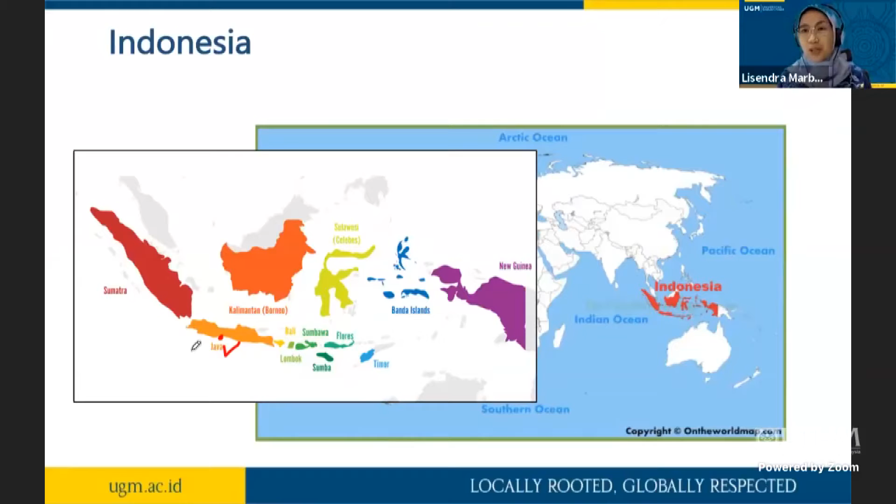I just take this opportunity to bring my country, although we are very close. This is Indonesia, and UGM is in Java Island. Yogyakarta is somewhere around here, so probably in the future if you come to Yogyakarta or UGM, you can visit us. Jogja is very known as a cultural city, and we have several temples close by. It's very cultural because we still also have a king and something like that. So it's very nice in my point of view.

UGM is actually one of the oldest and one of the biggest universities in Indonesia. Now we have a total student body of around 47,000 students, with 265 study programs. I work in the Department of Chemical Engineering, and we also have civil engineering, environment, and related departments. This afternoon I'm going to talk about membrane technology applications for environmental protection.

The outline for my sharing today: first will be membrane technology basics and introduction, afterward there will be some applications, and afterward some trends and challenges in membrane technology. So the first one is membrane technology basics and introduction.

If participants can give chat, I don't know if you can answer. If you try to take a look around, do you know if membrane exists around you? Do you know what membrane filter exists around you in your daily living? I don't know if you can think of something. You can chat, I don't know if students or other participants can think about something.

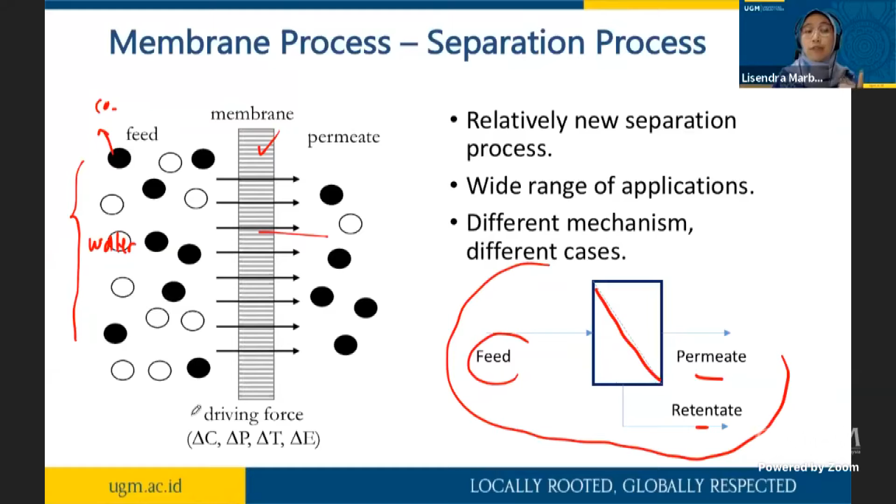So the clean one, and the other one is the rejected one. What is the driving force? The normal driving force is pressure, but we can also have different concentration or different temperature.

Why is it important? Separation processes and membranes relate to environmental protection. We see a bigger picture involving chemical industry, agricultural industry, houses, and mining - different types of human activities. Some of these processes are energy intensive, and membranes can work there for separation processes.

There is also a lot of wastewater produced. We have polluted water, and there is a need to separate the water and the pollutant, but we also have polluted air. There are really a lot of applications that separation and membranes can be used for. Membrane technology can be used for process intensification in chemical industry or processes in general, and also for purification of wastewater and for air pollution, for gas separation.

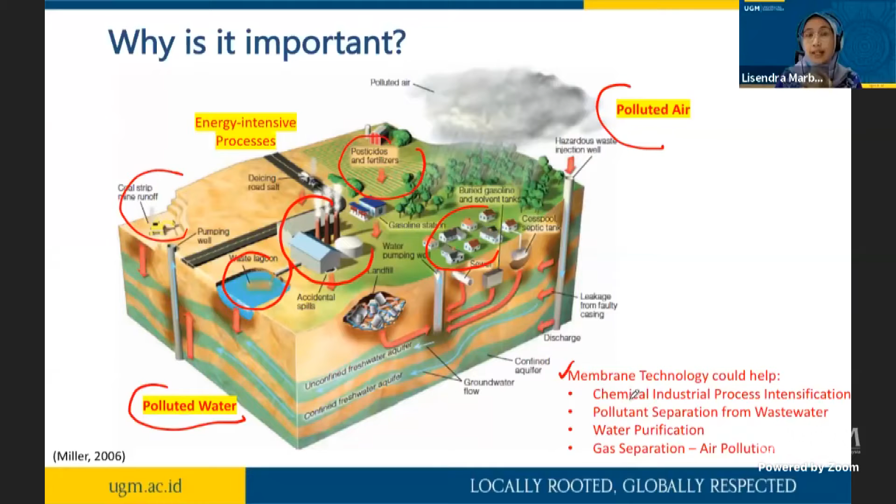Next, I'm going to talk about the basics of the membrane. That's the background of why it's very important, and nowadays it's being used in a lot of areas.

Basically, membrane processes can be differentiated into different names depending on the pore size of the membrane. If you remember, we have a process like this: we have the feed, the retentate, and the filtrate. This semi-permeable barrier, the membrane itself, has different pore sizes, measured in micrometers, whether it's macroparticle, microparticle, macromolecular, or ionic range. Depending on what we want to separate, we can name different types of membranes.

The first one is the normal filter, called particle filtration, but we can also have microfiltration membranes, which can separate bacteria and latex emulsions. We also have ultrafiltration, used for separation of viruses and proteins. We can have nanofiltration if we want to separate smaller organic molecules like sugars. We also have reverse osmosis when we want to separate salts.

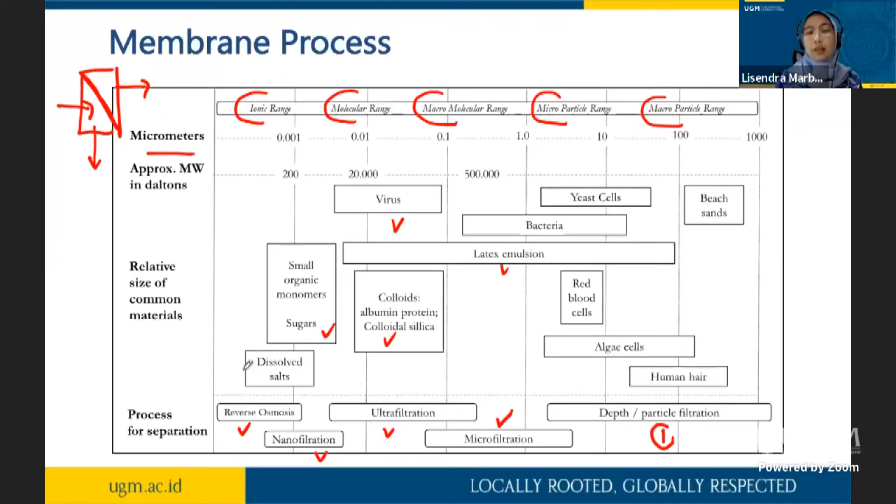And then more dense, we can also have dense membrane if we want to separate gases like nitrogen and oxygen, or methane and CO2, for example. So depending on the physical properties of the membranes, the pore size, membranes are differentiated into different types.

What about the history of the membrane? It actually started in the beginning of 1920 in Germany, during the war or something like that, where there was a need for people to have clean water to drink. It was microfiltration, the first filter found, used to remove bacteria from water. Afterward, it was improved, and they found hemodialysis, if you know this membrane.

This is one of the most used membranes. It's for the kidney - if you have a kidney disease, it separates the dirt from your blood. So this is one of the oldest membranes also, and now it's still being used.

Afterward, it grew for other applications, for desalination - to get clean water from seawater - and then afterward it was used to remove water from proteins for concentration of macromolecules. After the 80s, it started to grow into gas separation for hydrogen recovery, and afterwards it also grew for dehydration of organic solvent - pervaporation and nanofiltration.

So the first one is microfiltration, and then reverse osmosis. Afterward, it moves on to gas separation.

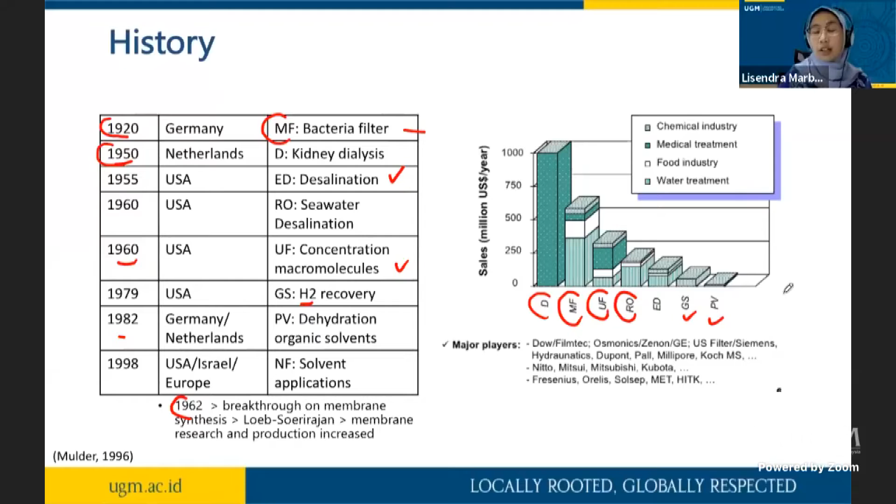If we differentiate the membrane types, there are two main filters. The depth one is when you have a lot of pores inside, and the screen one is normally what we call a membrane, because the separation occurs on the screen of the filter, on top of it. The membrane can have cylindrical pores, or it can be porous all over, but it can also be dense membrane, which is used for gas separation.

This is normally for nanofiltration, and this is for normally microfiltration and ultrafiltration. So depending on the structure of the membrane, they can look very different.

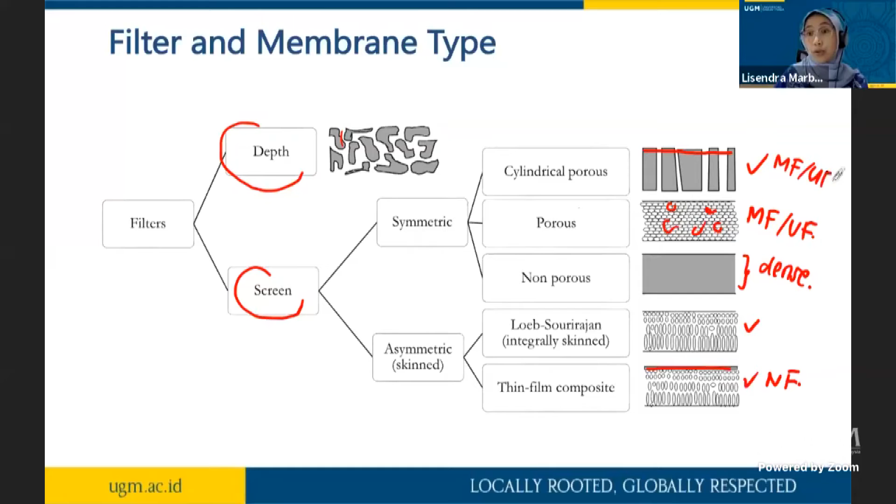So this is the scheme. Actually, this is screen filtration, because the separation occurs here. For example, we have water, then the water will pass through, and the particle will be retained on top. While in depth filtration, the normal filter can be made from mesh filter or other things. Normally it can clog inside the filters.

So this is a porous filter. When it's a porous filter, it means there's a gap for the molecule to pass through. But when we have a dense membrane, it's something like this, but still...

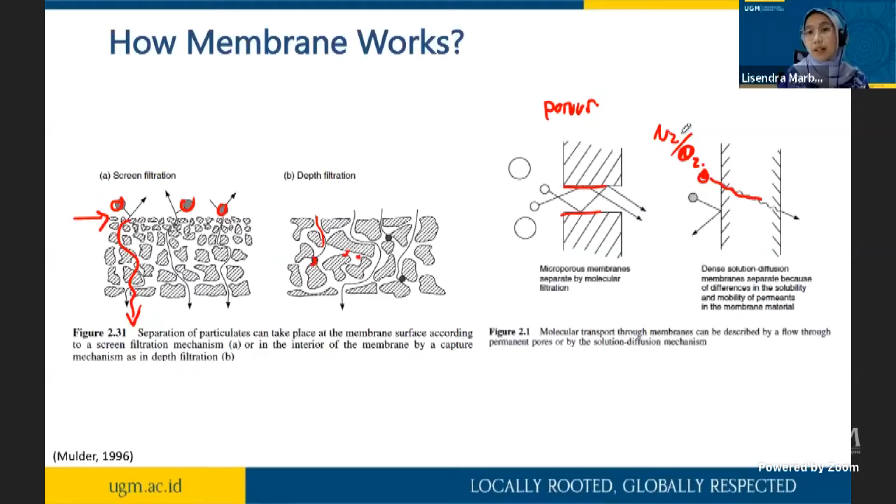chemicals can pass through. This is for gas membrane. For example, when we want to separate nitrogen and oxygen, the diffusivity of the chemicals will determine the transport of the membrane. So membranes can be porous and membranes can be dense.

So how do we make membranes? Basically, the most used one is phase inversion membrane, made from polymeric substances. How do we make it? We do phase inversion in a solvent, and then the solvent is evaporated. It's for cellulose acetate, polyvinyl chloride, but you can also have immersion precipitation.

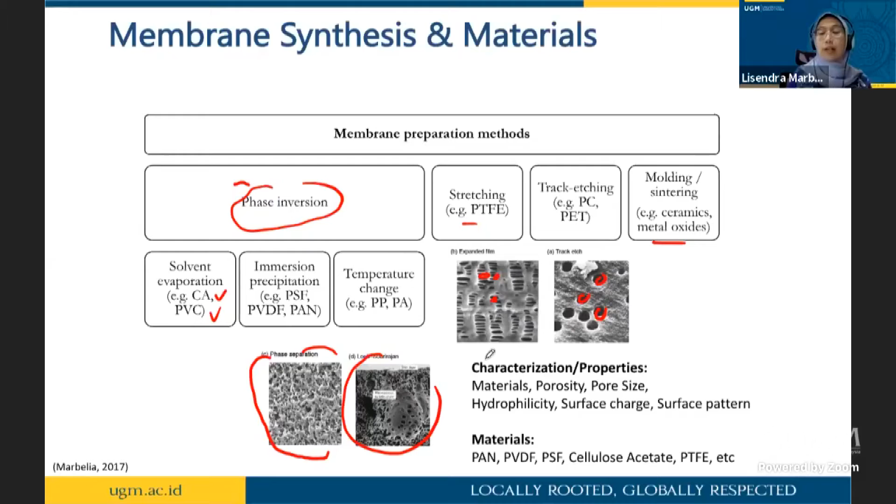So for characterization, what is important is the materials, the porosity as I mentioned before, the pore size, and the chemistry of the surface is also very important. And the materials I mentioned are like this.

So how does the membrane look? It looks like this. The first one is what we call flat sheet. In flat sheet membranes, when the membrane is made, it will be like a layer of paper, and then it's potted into a module, something like this. The size can be smaller or bigger depending on the application.

It can also be formed into multi-tube. If you see, this is like a straw, and then they put it in a big housing. And the last one is hollow fiber. Hollow fiber is very small, and then they put it in a module, something like this.

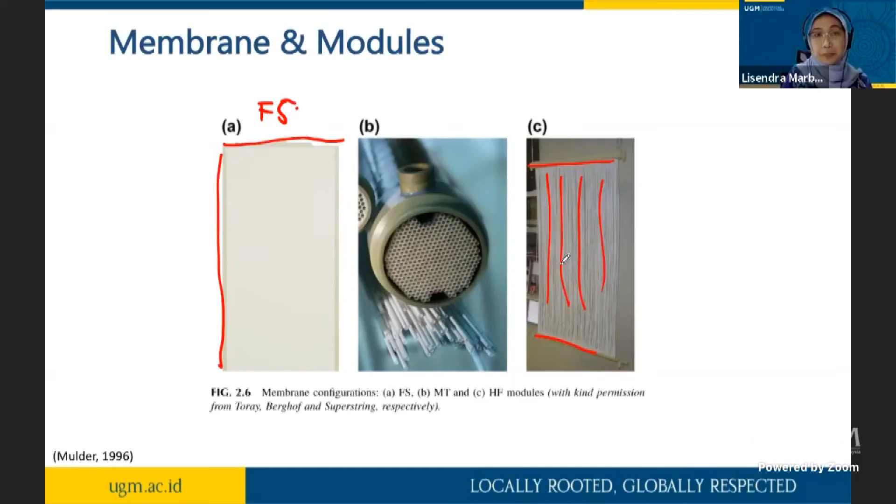So for different applications, different types of modules can be used. How it's made, as I mentioned before, the most used material is polymer. So with polymer solution, we make the casting, and after that we do the phase inversion.

It looks like this when it's at a bigger scale, and it's already produced a lot for different applications. The polymeric solution is cast here, then it's immersed in water, and then it's washed around here, and it looks like this.

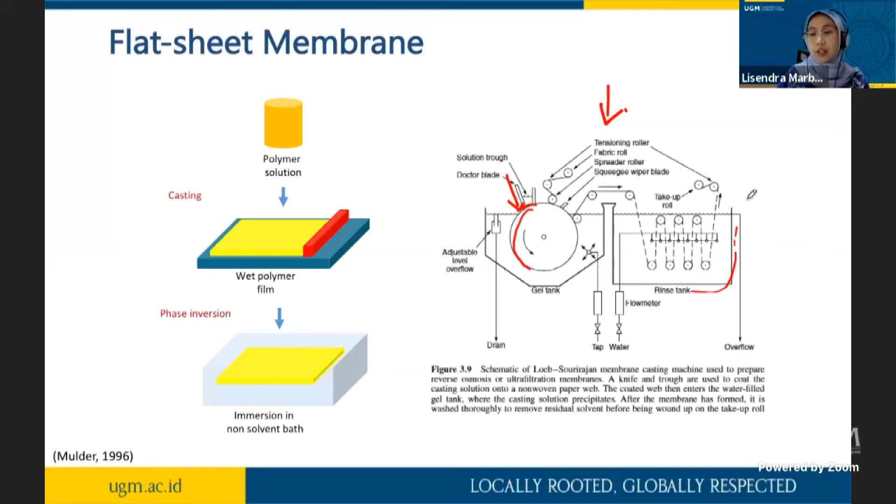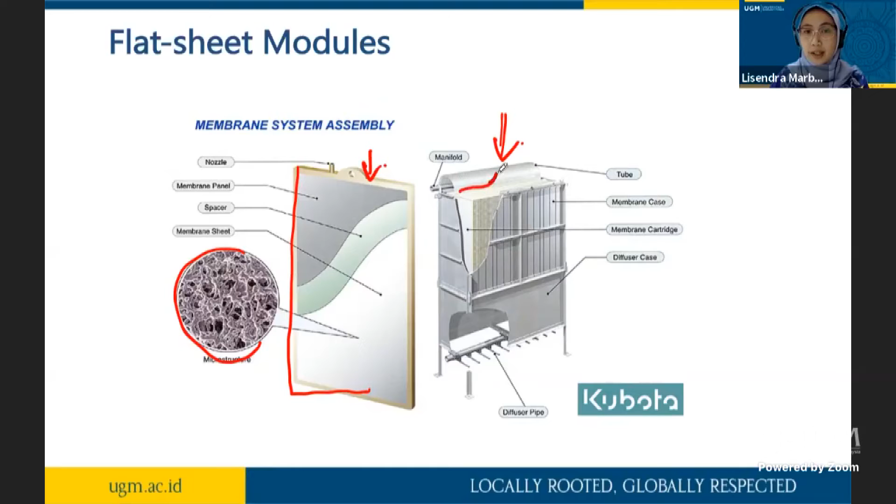Normally, these are the modules. If we see the microstructure, it actually looks like this. And then normally, this is what we call membrane modules. It contains a lot of flat sheet membrane filters, arranged so that the permeate can go to this pipe, and then it's collected.

Different shapes include spiral wound, which is also flat sheet, but they are not in an envelope state, rather they are rolled, something like this. Normally this is used for reverse osmosis application, and also gas separation, using spiral wound modules.

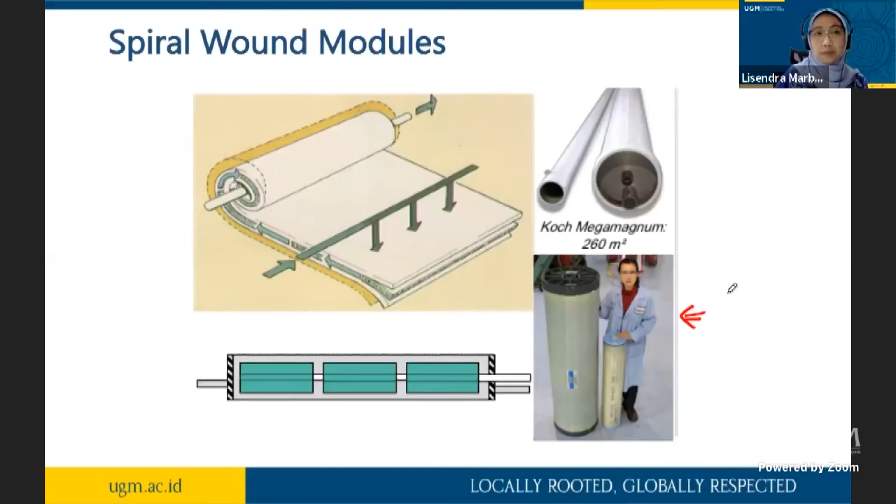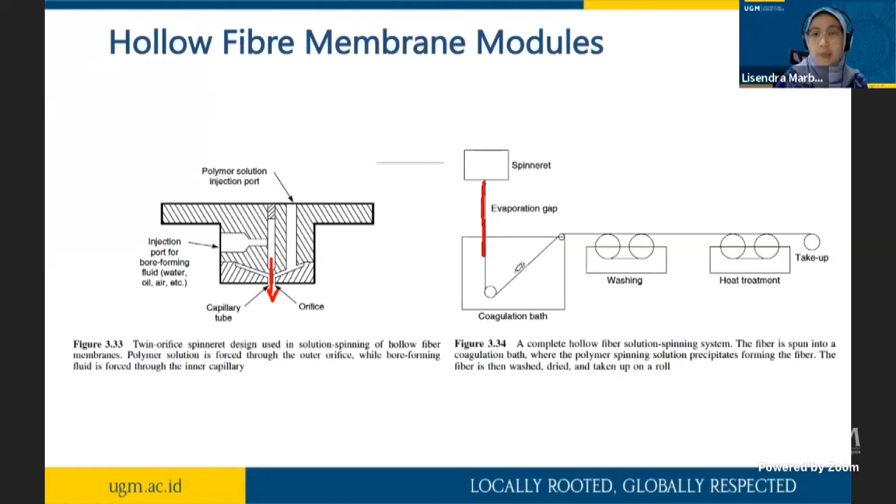For hollow fibers, it's the same - there is also the polymer part, but instead of casting a thin layer, it goes into a spinneret. It's like a ring, and the polymer solution goes outside this, then it immerses into the water, solidifies, and it's ready.

So it looks like this: the membranes, and the membrane housing. It's normally something like this, so this is the membrane. For example, if we use it for wastewater treatment, we can put this inside a big tank, something like that, and the permeation will happen from outside to inside this membrane, and then clean water can be collected.

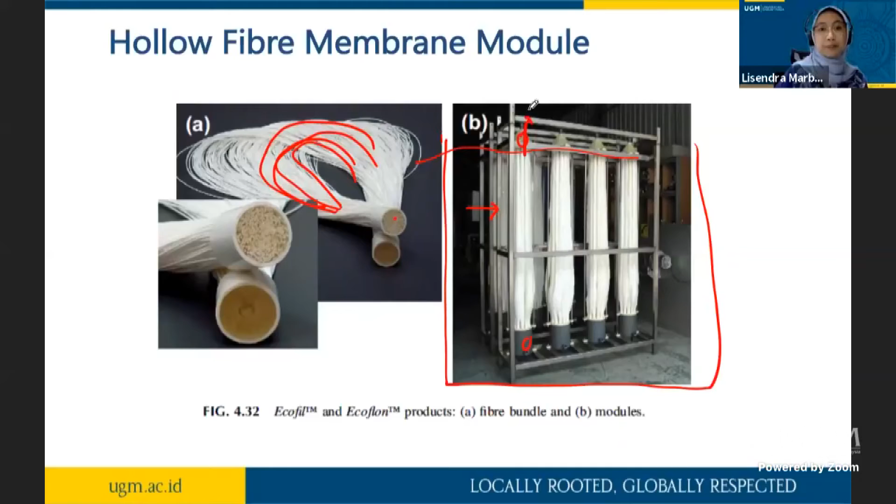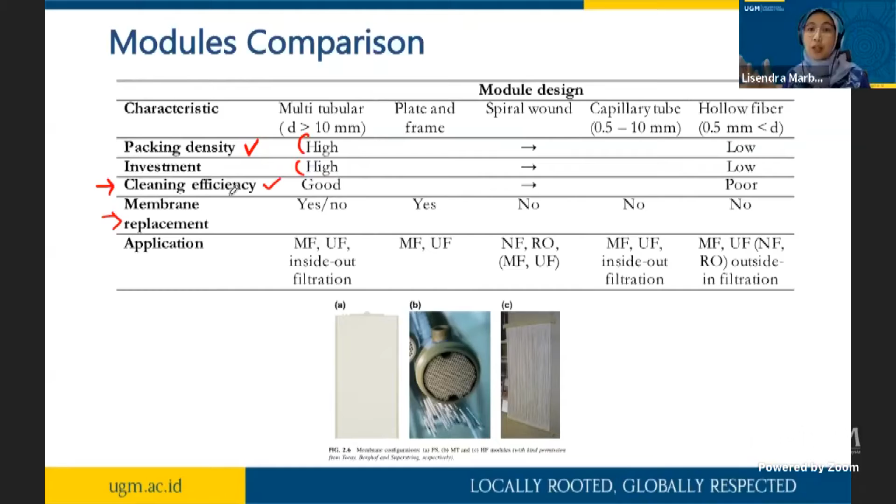This is also important because after use, the membrane will get dirty after some time. And membrane replacement, because the membrane can also get broken. So this is also something we need to consider. For your idea, for example in wastewater treatment, once we use the big modules, normally they can stay for 10 years. And then it really depends on the feed that we use, most importantly, and also the cleaning that we apply, because if it gets dirty more often we have to clean. So these things will determine the lifetime of the membranes. So it has different advantages and disadvantages.

So now we already have the basics of the membrane. We make membranes with polymer or other materials, and then we can have them in modules. So what is it for? In terms of environmental protection, there are two main topics that I want to bring today: water and wastewater, and also gas separation. But as Dr. Mimi said, I work mainly on wastewater, so it will be a lot on wastewater, while the other is just a little bit of information for you.

So why is it actually important? I want to bring the fact that water pollution actually exists, and it's really important for us to take care, because this data is from the United Nations summary update from 2021. Actually, less than 50% of domestic wastewater in the world is safely treated. For industrial wastewater, it's probably not very difficult because they have the money, but for domestic wastewater, it's quite challenging because wastewater treatment needs money. Of course, you need a lot of money for the investment, and the fact is, it's very limited,

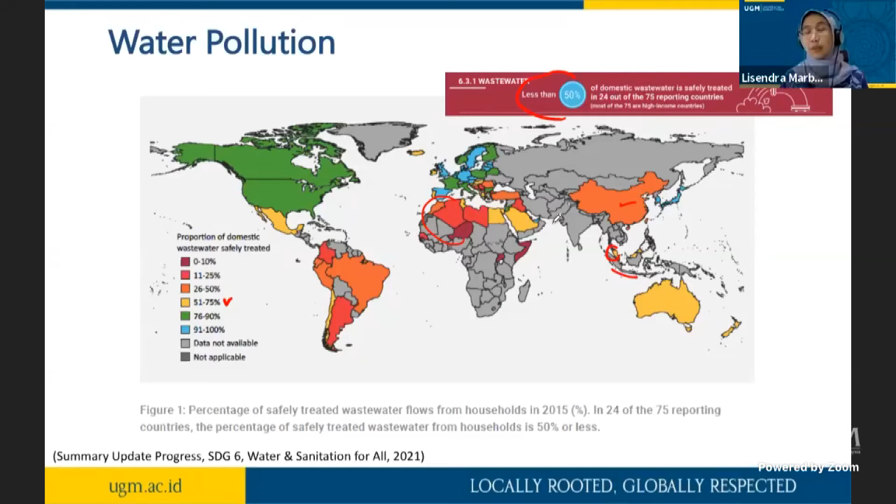the wastewater treatment. There is no data for Indonesia here, but Malaysia is quite good, I think 51 to 75%. But in other areas, the red one is quite low, right? It means that a lot of water is still discharged without treatment. On the other hand, we know that water is a very valuable resource, and water in the world is now experiencing stress. Indonesia is already in low stress compared to Malaysia. Here it's blue, so it's less stress. In some areas of Indonesia, meaning the water we take from the earth is more, and we discharge it without treatment. So it's something we have to take into account.

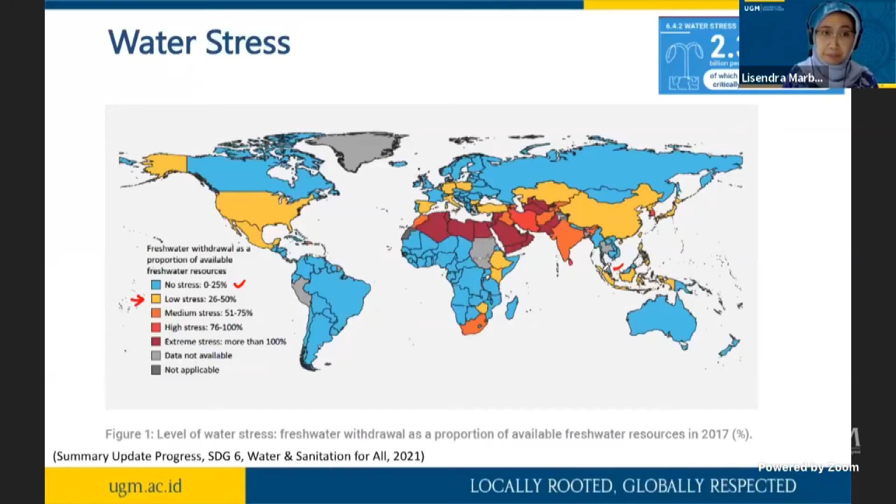First one is water. How about air pollution? This is data from a book from 2014, but still okay, just to give an idea. In the air, pollution can be greenhouse gases, but it can also be particulate matter. The particulate matter in this area, the red one, is actually quite sad, because it's quite high. It means there is a need for everyone to see this and to solve this problem, because it's very dangerous for our health.

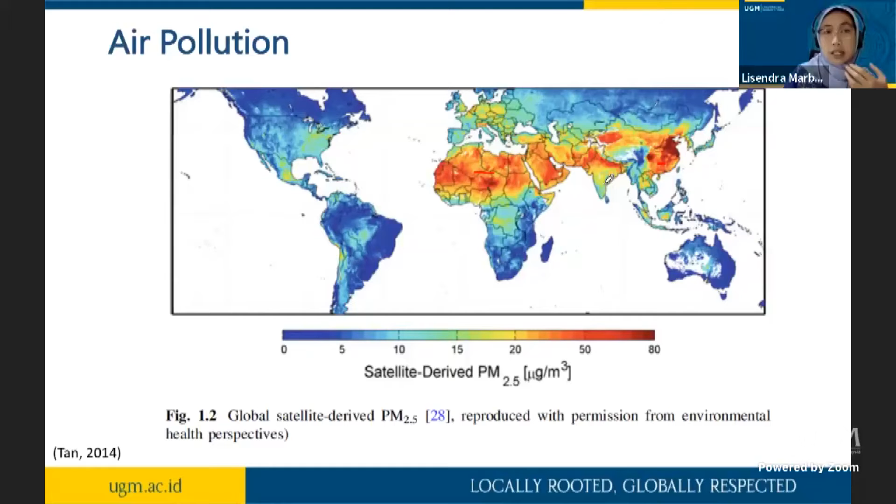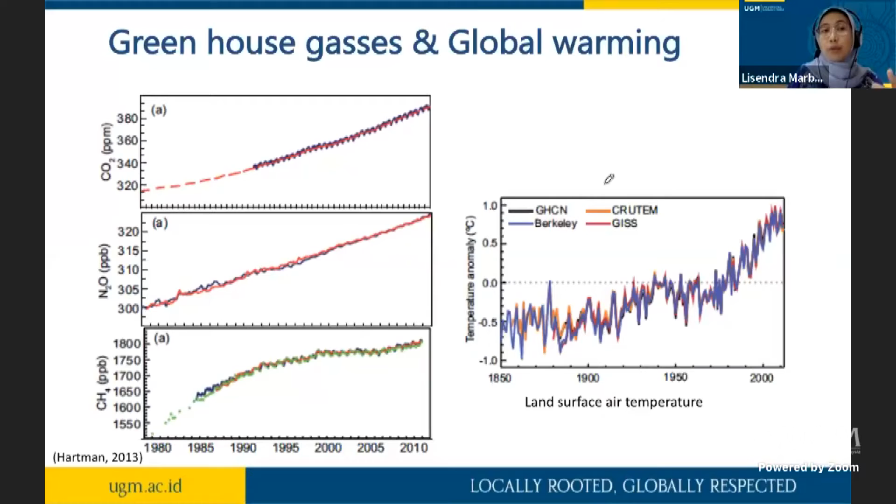Not only particulate matter; greenhouse gases, as we already know, are also increasing every year. The temperature is also increasing from climate change, indicating that these greenhouse gases are around us, and we need to take care of how we can reduce them. So from the point of view of sustainable development goals and environmental pressure and impact, we actually have to reduce it. If we see this as time, and we use resources like water and clean air, economic activity and well-being increase, right?

Because, okay, we have industry, we have a lot of things that we need, human needs are fulfilled. However, on the other hand, we cannot say no, the environmental impact is there, and it lowers the quality of our air. And what we need to do is decrease this impact. We cannot eliminate it 100%, because human activity in industry and daily life will influence the environment, but we can minimize it.

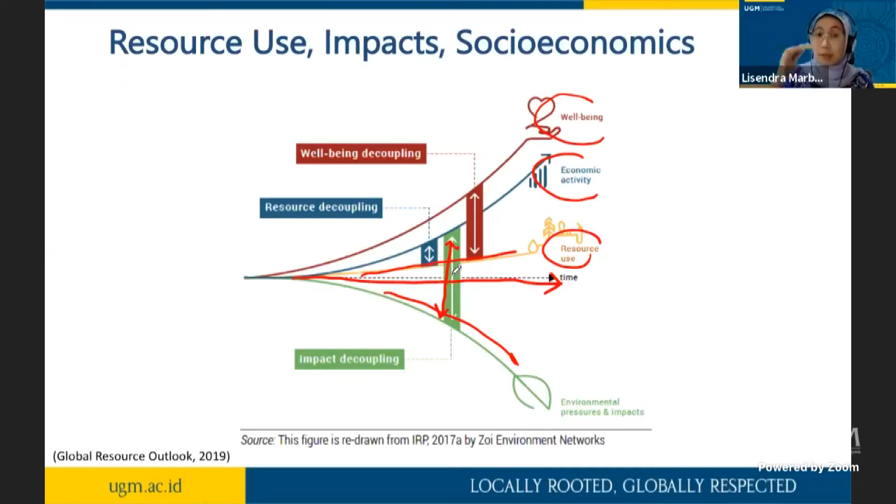Okay, if we remember the sustainable development goals, of course, if we are talking about water, then it relates to clean water and sanitation. It also relates to life below water, but also indirectly to life on land, and climate action and a lot of things. So this is something that we have to see.

So the first one is gas separation. As I mentioned before, we cannot avoid this air pollution, so how can we solve this problem? Air pollution is actually one big problem, because compared to water pollution, it is very difficult to treat, because once it's released, whether from your car, from industry, or from natural sources, it's released.

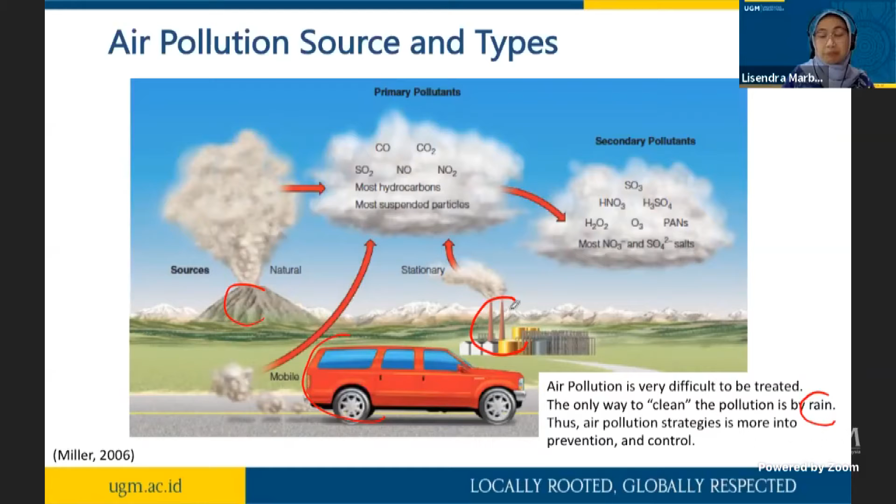The only way to clean it is actually by rain, so it's in the air, and then it can come down with the rain. So what we need to do is actually to prevent and control air pollution. So if, for example, we work in industry, then we have to think really about how we treat the air pollution, so that before we release it, we already have clean air, clean gases, something like that.

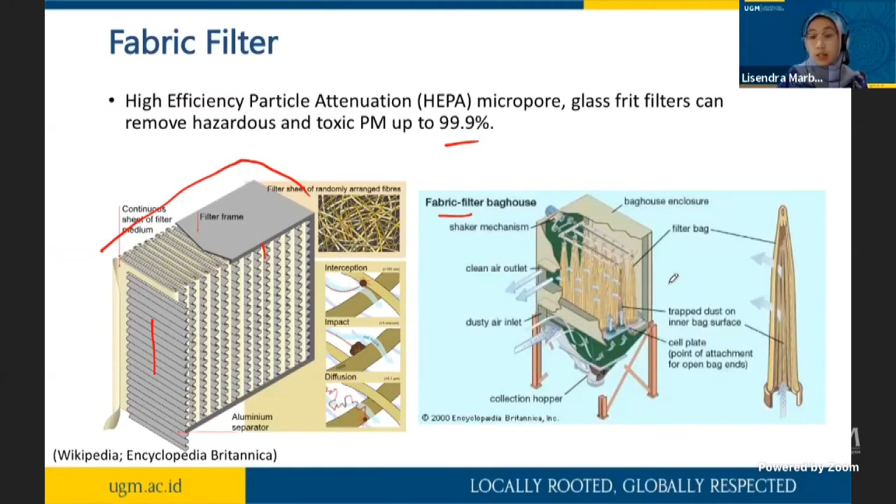So if we talk about air pollution, then this is one renowned filter, HEPA, high efficiency particulate air filter, which is already widely used in industry. It's a kind of filter shaped in a pack, something like this. It's a flat sheet, but it's arranged with a spacer here. The gas passes around there, and it can trap more than 99% of particulate matter, toxic and hazardous. And also the fabric filter, for example, is quite good in terms of removing particulate matter and hazardous materials. So that's for air pollution.

And how about CO2? Because CO2 now gains a lot of attention, because it's everywhere, from flue gases, from our exhaust gases, and so on. So we need to capture it. Actually, there are a lot of technologies that can be used, like absorption and adsorption. This is the more traditional way, and it's already used everywhere, when you use MEA or DEA chemicals or solvents for separation. But also these days, membranes are used to capture and separate CO2 from the gases.

We use ceramic membranes because most of the time the flue gases are hot, the temperature is quite high, so we use ceramic membranes here. But polymeric membranes can also be used when the temperature is not high. So depending on the polymeric membrane, we can really separate the CO2 from the other elements.

Membranes are used these days for biogas purification. If you know biogas purification, we have an anaerobic digester. So if you have organic waste or cow manure or a lot of organic waste, you put it in anaerobic bioprocessing, and then it can produce methane and CO2. So methane and CO2 and other gases.

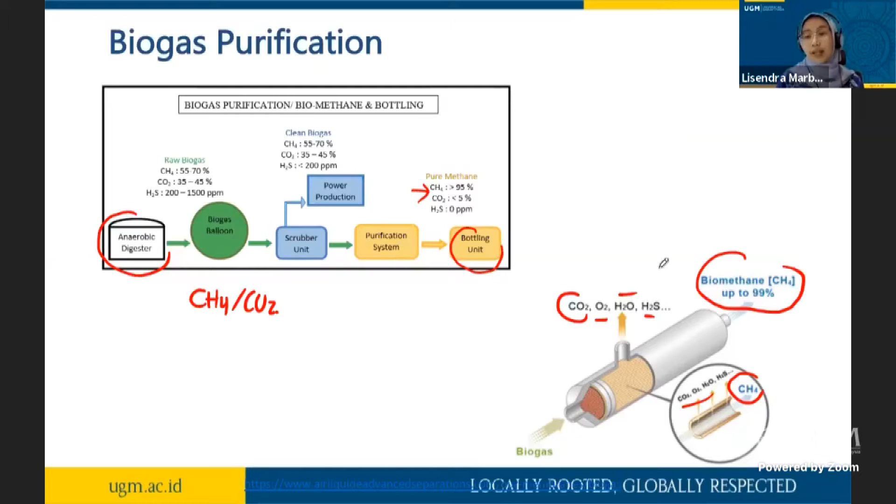But these days researchers also develop membranes that can separate CH4, methane, from other materials like CO2, oxygen, water, and hydrogen sulfide. So they can produce biomethane up to 99%. So this is also membrane technology applied to processes. Okay, so that's for air pollution.

Of course, if we are talking about industrial wastewater, then it can contain a lot of chemicals depending on the process. If we are talking about gray water, this is from your houses, then it can contain shampoo, residue from your kitchen, detergent. So it basically contains organics, nutrients like nitrogen and phosphorus, and also total solids, dissolved solids or suspended solids.

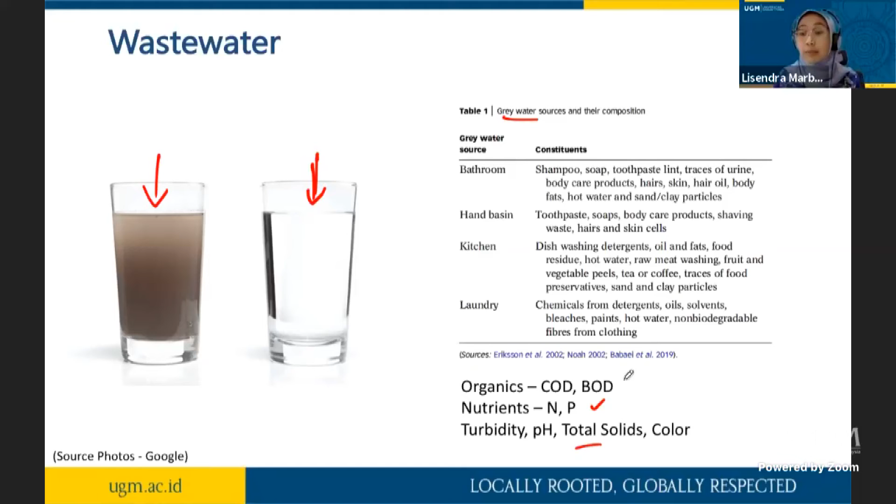So it influences the color, the smell, the pH, and this is something that we need to treat before we discharge it. So the organic pollutants and the nutrients, I'm talking about domestic wastewater. Organics are bad for the environment because they can cause problems to our ecosystem. Once they enter the water body, for example, discharged into the river, they can consume the oxygen there, so the fish will lack oxygen. Then the ecosystem will be disturbed.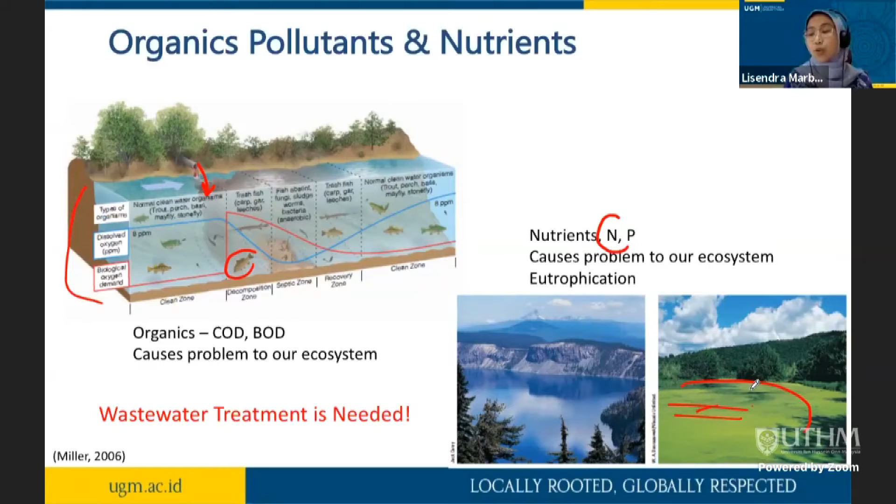Nutrients, on the other hand, also disturb the environment. Once you see a very big pond colored green, it means there is eutrophication, because the algae grow very fast, because there are a lot of nutrients, a lot of nitrogen, a lot of phosphorus. And this is also not good, because once the algae is there, the ecosystem below it, the fish, the other plants, will not be able to get sunlight and also oxygen. So this is not good for our ecosystem. So organic pollutants and nutrients.

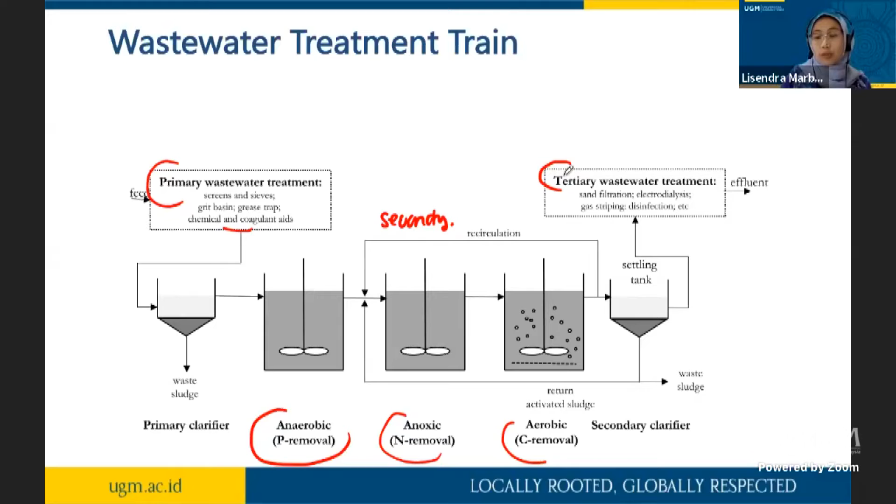So what we need to do is basically wastewater treatment, and we know that wastewater treatment has a lot of steps. We can have primary wastewater treatment, with chemical coagulants, screen, basin, and so on. Afterward, it will go to the secondary, in which there is biological treatment for phosphorus removal, nitrogen removal, or carbon removal. And afterward, it can go to the tertiary, if it needs to be disinfected or further treated. Most of the time, these treatments need a lot of area.

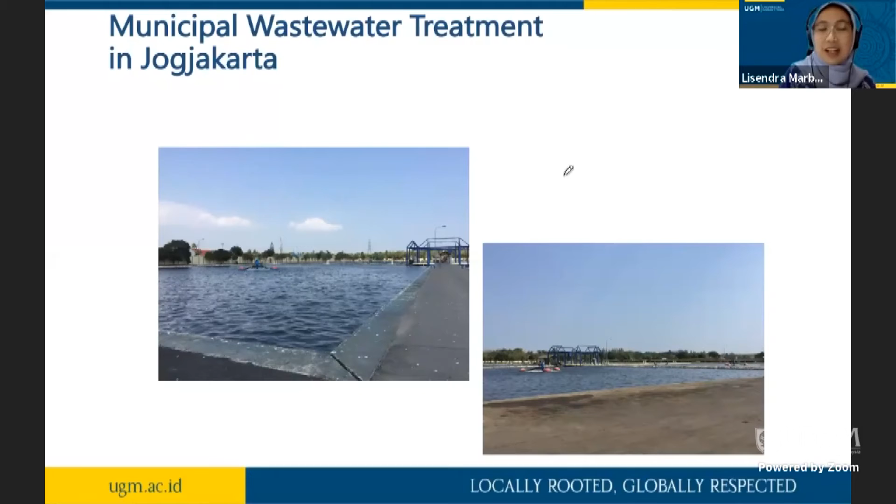So this is actually a picture of municipal wastewater treatment in Jogjakarta, where my house is. Our wastewater from the houses will go there, but it's like a very big water pool, like a swimming pool. It's very huge. If you have a big area, then that's not a problem. But what if it's a limited area? In industry, most of the time you don't have a very big area for your wastewater treatment. So in this case, we can use a membrane bioreactor.

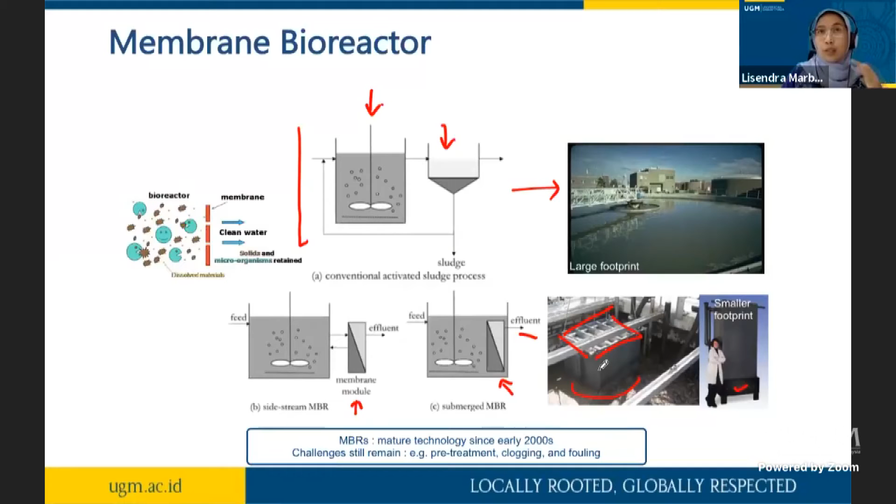So in the end, what we have is a clean effluent with a small footprint, as you can see here, and these are the big modules I mentioned in the beginning. I think in this case it's flat sheet, arranged into this box, and immersed directly in the tank. It's a mature technology since 2000, and it's used widely all around the world. It's still expensive, but it's worth the money. If you have a very small area and cannot have a sedimentation tank, then it will work.

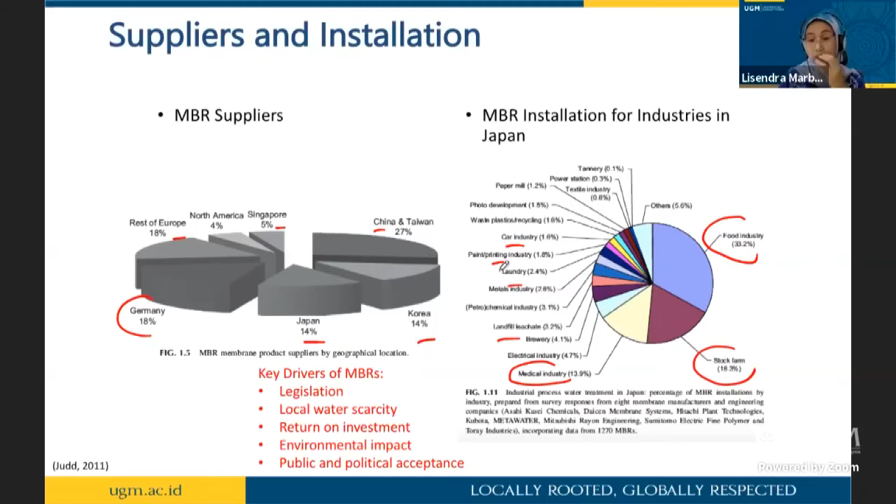I think a lot are produced in the USA, Japan and Europe. MBR suppliers are in Germany, Japan, Korea, the rest of Europe, Singapore, China, Taiwan. Where it's used mainly is in the food industry, stock farms, when they have a lot of wastewater, the medical industry, and also laundry wastewater, leachate wastewater, the car industry, the printing industry. So a lot of applications for wastewater treatment.

Okay, so this is a video. I think we can take a look. Wait, let's check.

But I'm not sure if you can hear the voice. Probably not.

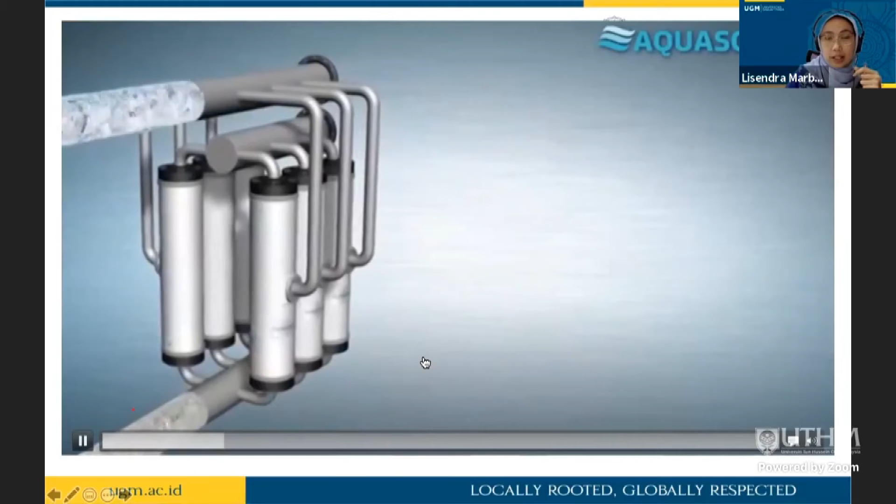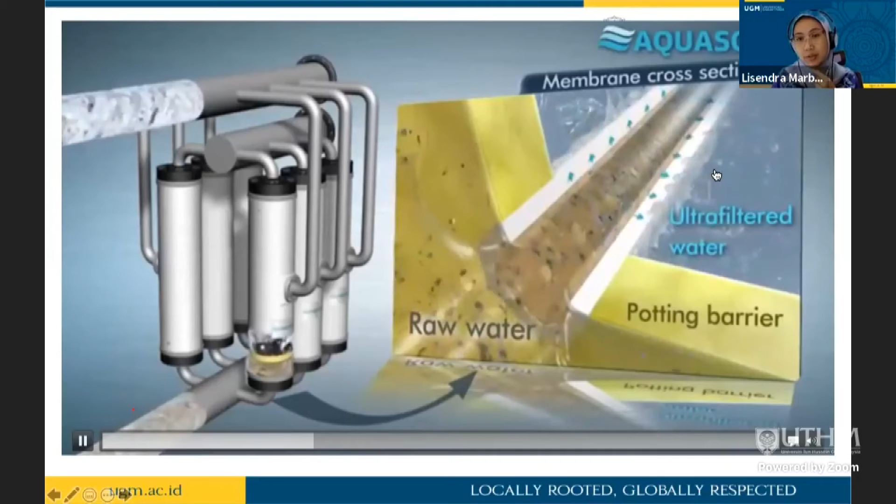So it's basically an ultrafiltration system. So this is the feed, and then it enters the modules here. So this is the feed, as you see. Okay, if we can zoom in. So this is what happens in the raw water. This is the membrane. And it gets outside. And then this is the cartridge. We call it cartridge. It contains 20,000 membranes.

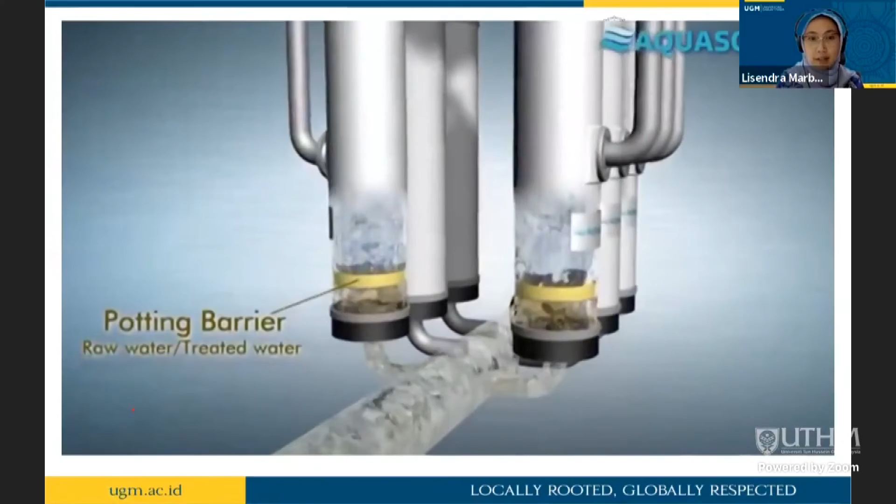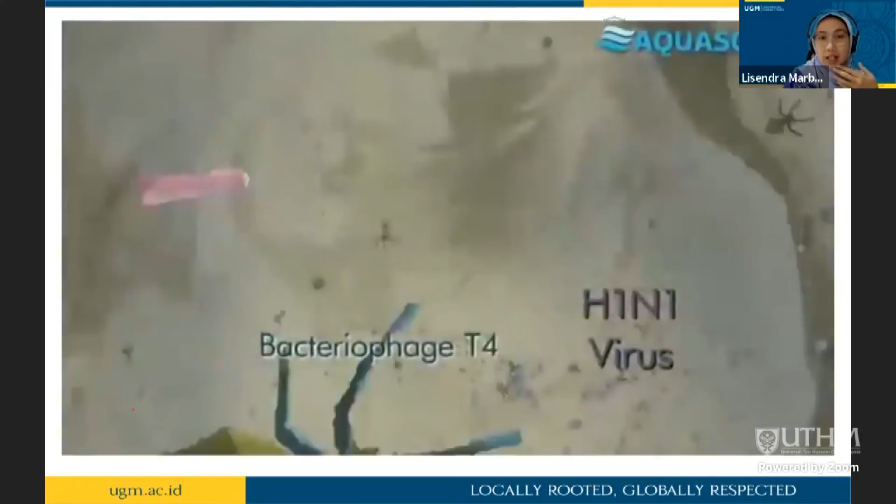So this is how they put it inside. This is the dirty water. It can contain viruses, coliforms, bacteria, and so on. So this is the entrance. So this is how membranes look. So these are pores. So this is hollow fiber, I think, because we enter one straw. And then the filtration pores.

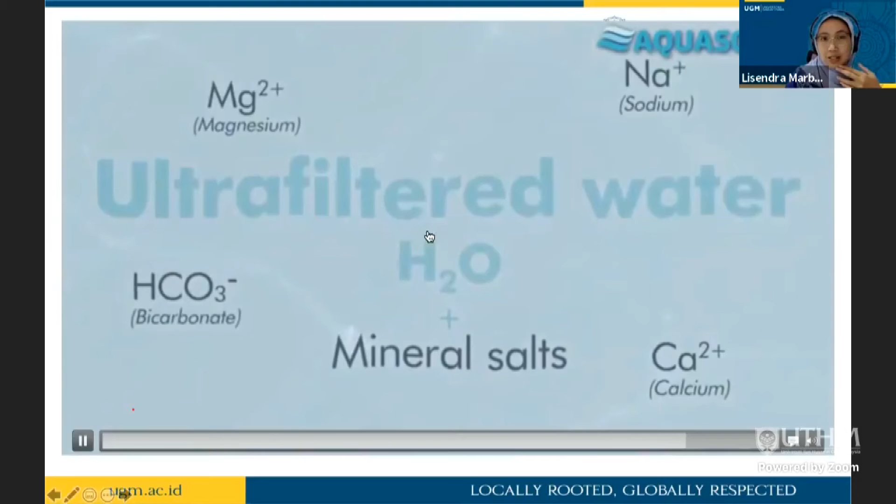Okay, what can pass through is the salts, whereas the bacteria is retained. And then the clean water goes outside. So this is just one example of the application: ultrafiltration for water cleaning. Okay, so what's left is the trends and challenges in membrane technology.

So I already mentioned MBR. It's used a lot in industry, but the current trend nowadays is MBR used in, for example, an office building or whatever. There, it's actually for water reuse. So if you can see here. Oops, sorry, my pen. Okay.

So the building is here. The dirty water goes from the toilet to the tank, and then it's treated in the MBR, and it needs only a very small area, so you can just put it somewhere in the building, and then treated water goes to the surface water tank. It's not super clean, depending on the membrane that you use, but it can be reused, for example, for flushing toilets, together with rainwater here. So just using this cartridge module, we can have water reuse in this case.

And the second trend nowadays is combining bioprocessing for wastewater treatment. So in this case, this is MBR, and we know that algae, as I mentioned before, need nitrogen and phosphorus to grow. And on the other hand, the MBR treats the carbon, but there is still the possibility for the nutrients to

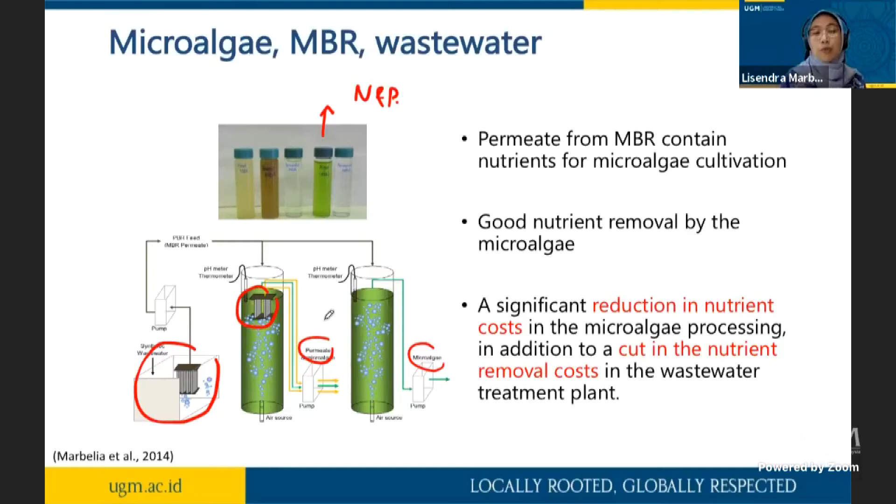be there. So there is a trend nowadays to use algae to treat wastewater, and at the same time the membrane is there again to separate your algae and your bacteria from the treated water, and in the end you have the microalgae and the clean water permeate here. So this is combining nutrient removal and organic removal in the MBR.

And of course desalination. This is not something new, but it's interesting because it's used everywhere. Instead of distillation, when we want to get clean water from seawater, we use reverse osmosis. But of course, this is not direct. Seawater is not very clean, so normally we need pre-treatment: coagulation and then filtration. In this case, we can use microfiltration or ultrafiltration.

Whereas in reverse osmosis, we have a much denser membrane. And afterward, we have clean water from the system. And this is used a lot to get clean water from seawater.

And then these are the challenges. As I told you in the beginning, when we have a membrane in operation, we have dirty feed, and most of the time we will have problems with fouling. So imagine that we have a membrane surface, and we feed something dirty, and this dirt will block your membrane, and at some point your membrane will stop working because the water cannot pass through.

So what you need to do is, of course, backflush. You just pump the water back, and it will push your dirt outside. We can also do relaxation, in which you do not operate your membrane 24/7, but there is a relaxation like 10 minutes on and then 10 minutes off. This is very important when you use your membrane. And of course, you can also apply air scouring.

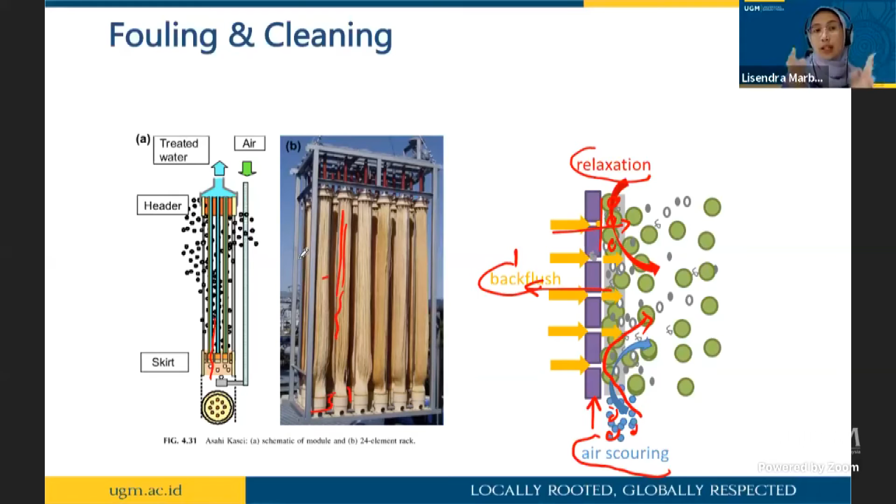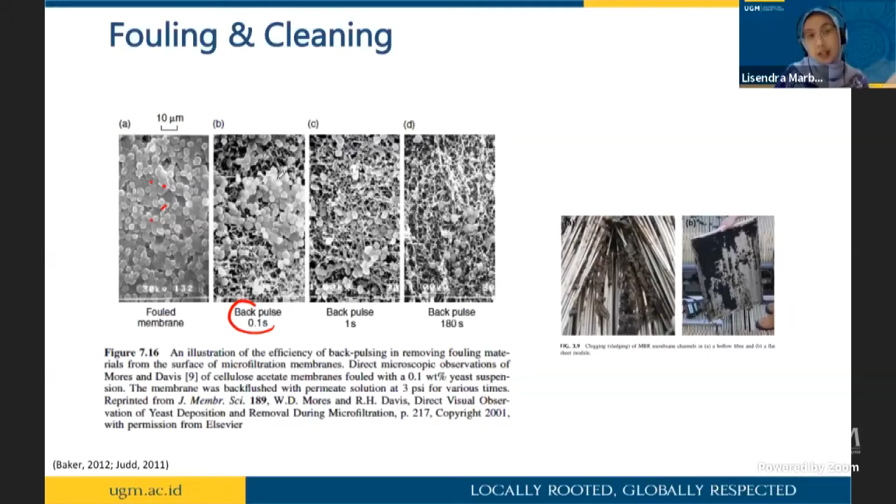And dead zone. So if we zoom to the membrane surface, what it looks like inside, it's actually something like this. So it's very dirty. But when we put back pulsing, so we push back the flow to the other direction, then the dirt will be removed. So when we put back pulsing longer, then we get clean membranes again.

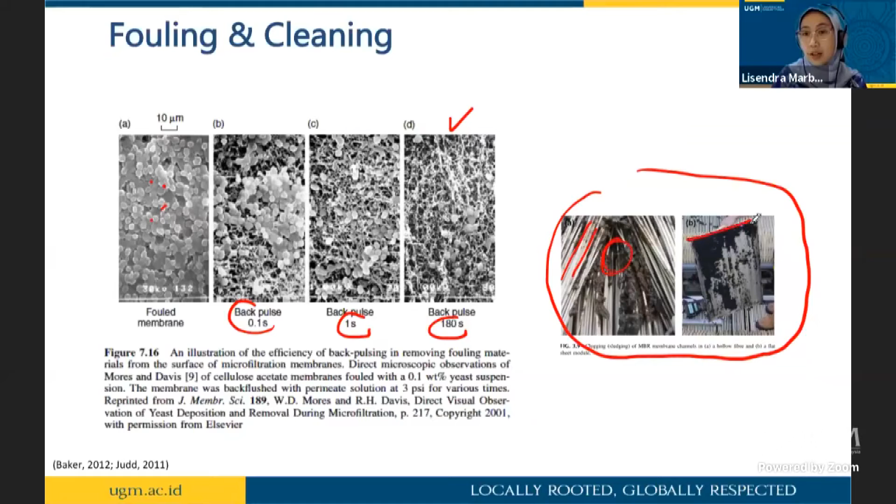On the right hand, you see that it gets very dirty, especially when we work on wastewater. This is the hollow fiber and this is your dirt and it gets really, really dirty. This is your flat sheet membrane and it's really, really dirty there. Okay, so what is the important parameter for membranes? This is to summarize the talk also. So this is for wastewater, for water.

For gas separation, they are still developing a lot of new material because gas separation is challenging because it's not depending on the size. It's not porous, but it's a dense membrane. So what is important is the materials. For gas separation, they play a lot on the materials: what polymer we have to put on top of the membranes so that CO2 or methane, for example, can diffuse faster.

But in terms of water or wastewater, the research on membrane materials is going on, in which we can play with the pore size distribution, hydrophilicity, surface charge and surface pattern in order to reduce the fouling, because fouling is normally one of the biggest problems of membranes in water treatment. Additionally, research on operational optimization is also very important. Like I mentioned before, backflush, relaxation or chemical cleaning is also something that we have to take into account.

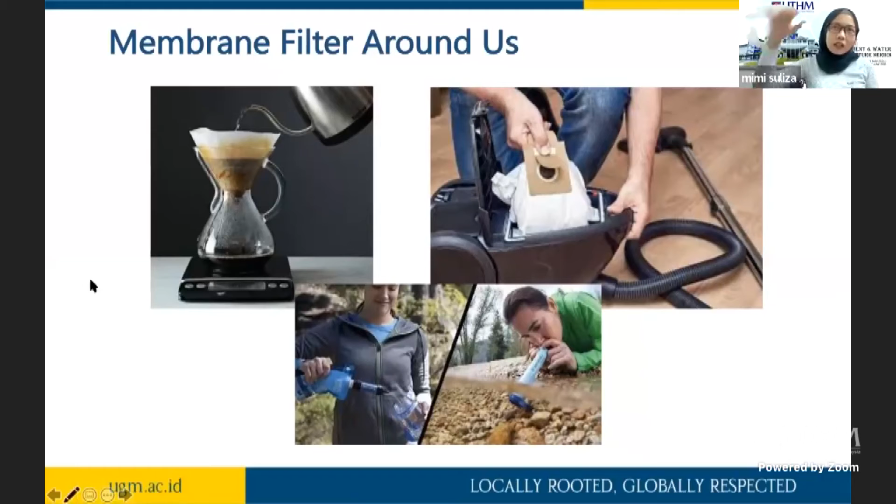I have one more question actually, Dr. Lila, because from the slide that you showed just now about the CO2 separation, the mechanism for CO2 separation that you showed, I can see that there is absorption and adsorption, two types. So I want to know what is the difference between absorption and adsorption.

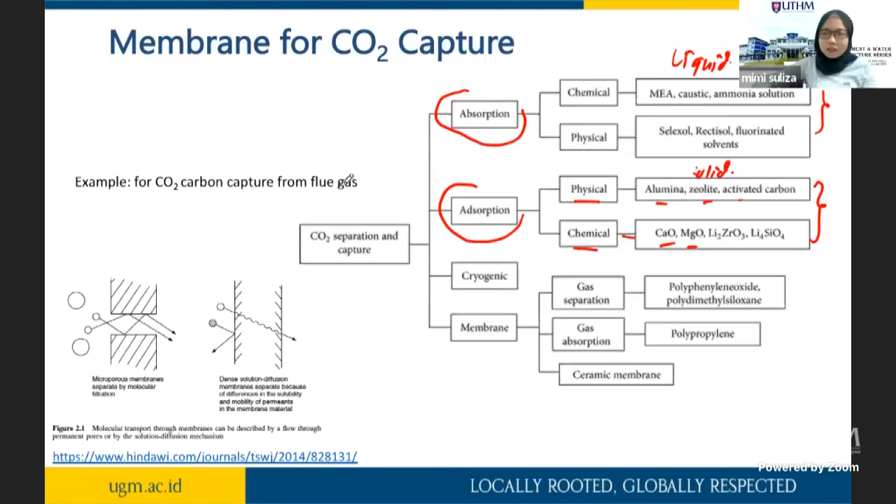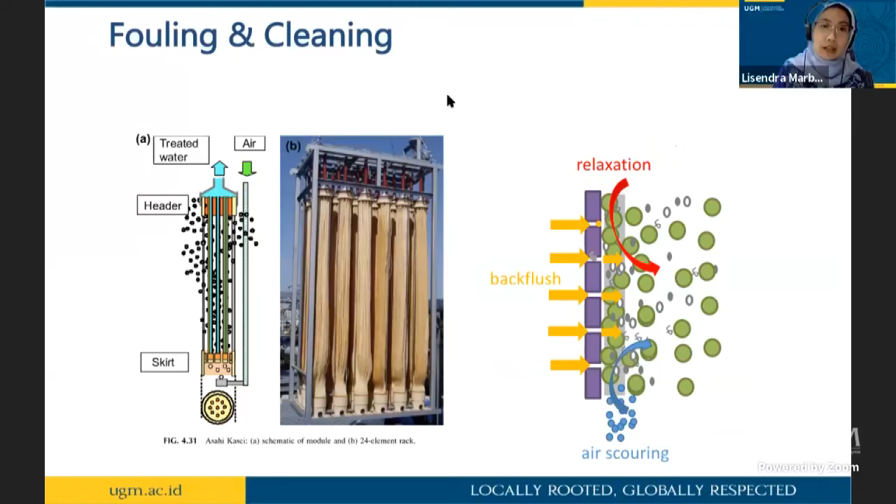I think for COVID, basically what I want to tell here is related to chemical cleaning. For cleaning membrane, you can use physical cleaning when you do back flushing or relaxation or spraying. But spraying, back flushing, it's just physical. If we are talking about viruses or bacteria, then we need to do something more, and that's chemical cleaning. The chemical normally used for membrane, of course it depends on the material of the membrane, but most of them use natrium hypochlorite, which also has disinfecting

disinfecting properties, so at the same time you can do disinfection. I think chemical cleaning at the same time can also kill that bacteria. If you are sure the bacteria will be retained by the membrane, it means they are inside the tank, then you can do the cleaning, something like that.

But I think the most important thing is the treated water. For example, if the treated water is to be used for service water, then you have to make sure that water is clean. If you are not sure, then you can disinfect the water with sodium hypochlorite or whatever disinfecting agent.

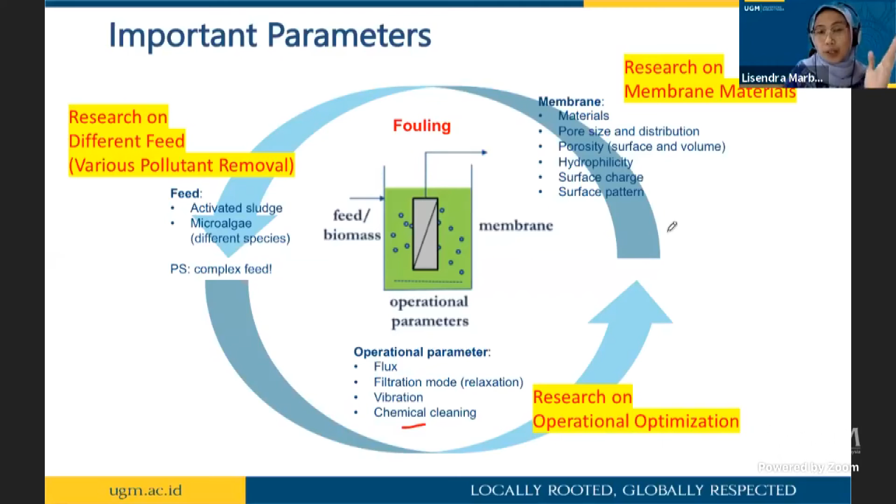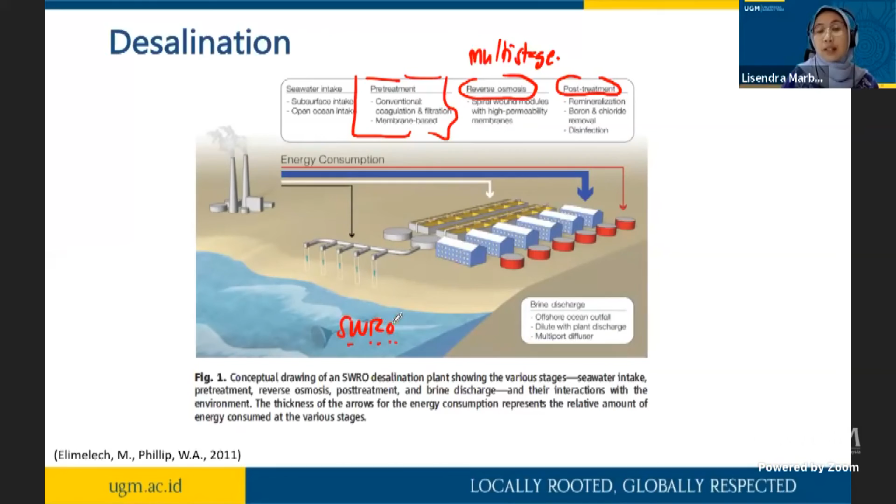But this is desalination with membrane reverse osmosis, they call it SWRO, seawater reverse osmosis. This is an established, mature technology also used for desalination. I hope that will answer the question our student asked.

Okay, and then I think this one is the last question we have, from Ili Zakaria.

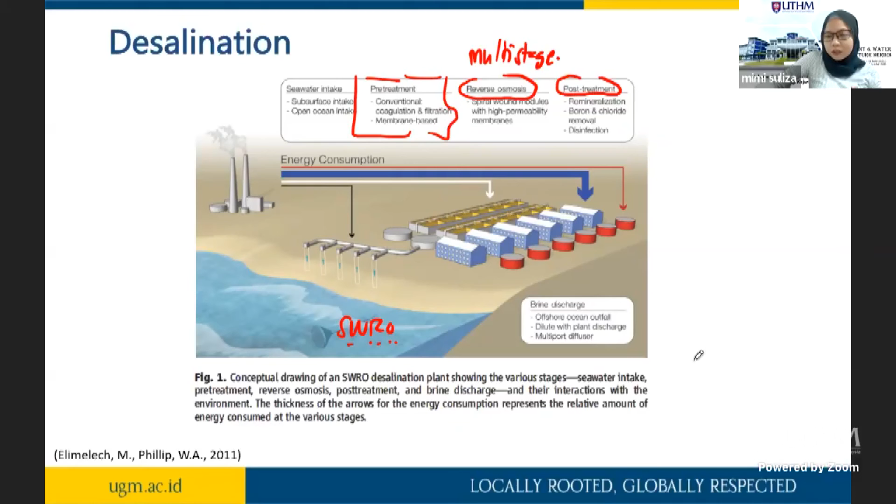Hi doctor, how does large recycle ratio affect contaminant removal of MBR system? Thank you. Okay, so yeah, that's a good question actually. So in MBR, what is different from the conventional technology is that the sludge is always retained here, right? So the sludge recycle ratio that is asked, it really depends on the case, I think.

But after some time, we anyway have to remove some sludge. It's the same also with conventional activated sludge, in which you use the tank and also the sedimentation tank, right? You also remove some sludge here. But from the publications I read, in MBR, because they retain the membrane and the microorganisms stay there, the biodegradation is much better, and at the same time the sludge production is not too much.

It means that the sludge that has to be removed, because this is also hazardous waste, right? This is solid waste that you have to take into account. This is much less, which is good in this case. But the recycle ratio really depends on the feed that you put, and then the activated sludge, the microorganisms inside your tank.

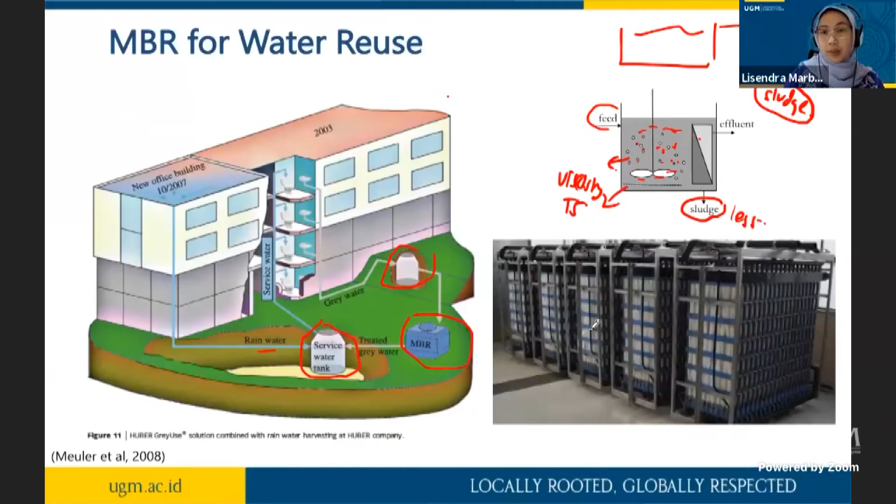Okay. And then we have one more question, from Alip. Hi doctor, how to know which type of membrane is good for MBR, and how to know whether the membrane is fouled or not? Okay, well, the type of membranes for MBR is actually ultrafiltration or microfiltration. And a lot of industry already produces it. I think I wrote it somewhere here.

But there are a few different membranes which are used here, because first they have to be cheap, and at the same time they have to be resistant to chemical cleaning. And these materials have been researched for a long time, and they have proven to be strong. So they are already used in the market.

And how can we know whether the membrane is fouled or not? It's normally by seeing the permeate. If you remember, when we have a membrane, we have the feed and then we have the permeate, right? This is the clean water. Membrane separation works with pressure difference. So if we apply a certain pressure, we get a certain amount of clean water.

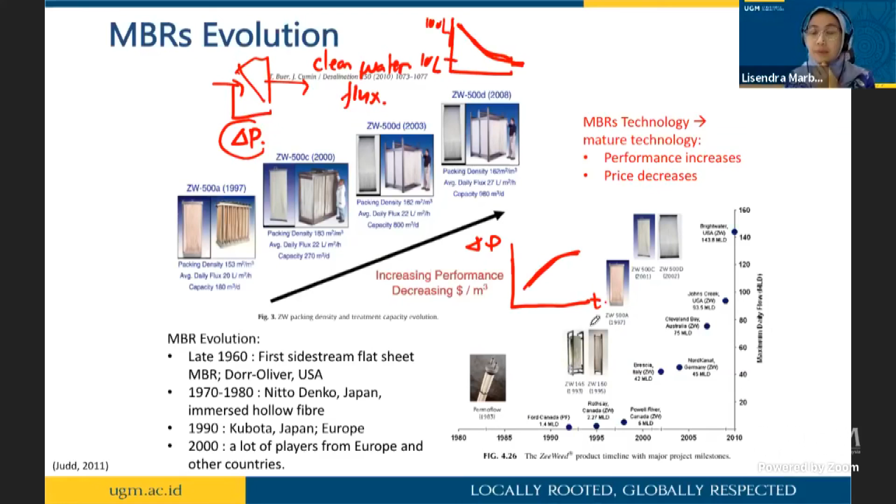All right. Yeah. I hope Alip got that answer, because Dr. Lila really explained it thoroughly. Yeah. And I think I also understand every word.

Yeah, but if you work in industry after this, for example for a wastewater treatment plant, and they have MBR, normally it comes with a guideline, and after it reaches a certain pressure or a certain flux, you have to clean it with acid or with base depending on your feed. Normally it comes with a guideline for this module or this cartridge.

Yeah. Should be no problem to clean that. Yeah, shouldn't be a problem. But yeah, you have to understand the basics. Okay, the membrane gets dirty, and then after one time you have to clean, and after that it will come back. But of course, after 10 years, for example, there is fouling that cannot be removed by chemical cleaning. Yeah, it stays there. So after 10 years, then you have to remove it, and then you buy a new one. Yeah, need to replace the whole. Yeah, right. Okay. All right.